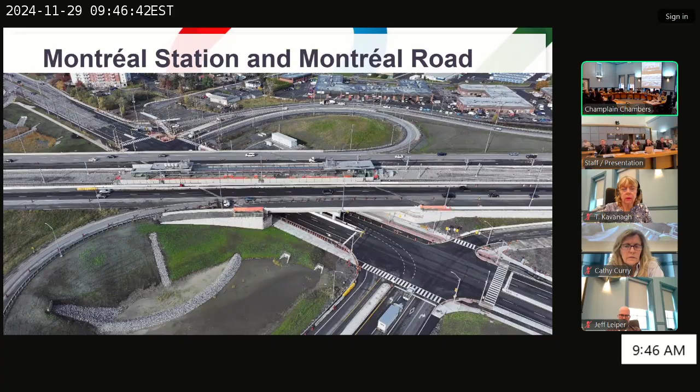If we move to the next slide, Jeanne d'Arc Station. On the civil side, we've been implementing some connectivity enhancements, as well as some rehabilitation works along the bridge itself and the road. This includes wider sidewalks and a new MUP.

They're really taking shape, as you can see from the photo here. As far as traffic mobility goes, traffic is currently on the two outermost lanes, while the innermost lanes are reserved for some of the final flat works, which are median related, including a curb that comes along the median there.

By the end of this year, all 4 lanes will be open at the bridge location. It's important to note that at the north end of the project we have the OC Roundabout project, which we're coordinating with closely, and that project does involve a lane reduction as you head northwards.

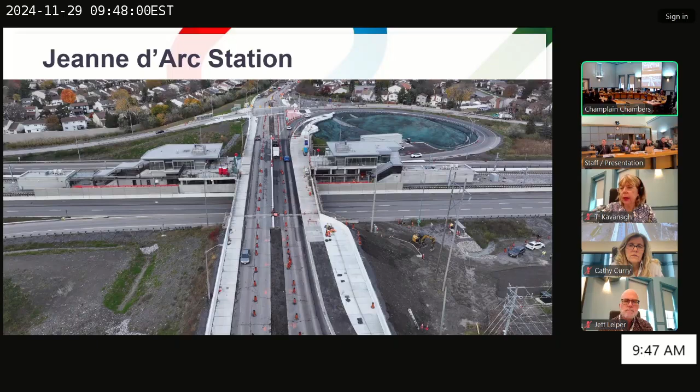Next slide, please. First, Place d'Orléans Station. Here again, the station's work is really focused around the system, testing, commissioning, and installing devices, including cameras, passenger information display systems, that type of device. At the outset, I just want to highlight how complex the station is.

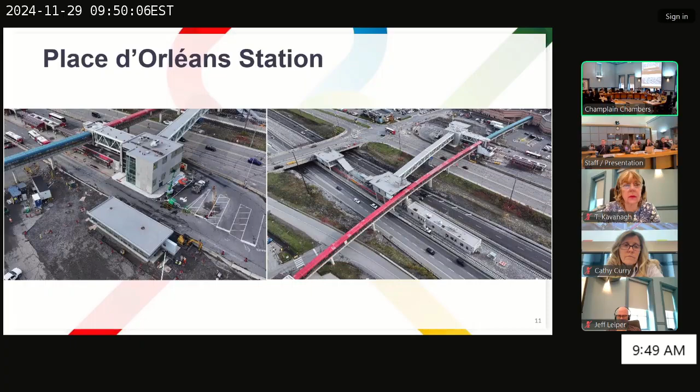If we move over to the right-hand side of the photo, you can see how that extends into the median where we have an east and a west station. In general, at this location, to highlight the complexity, we have 3 sets of elevators, 4 sets of fare gates, and 4 sets of ticket vending machines, just to touch on some of the elements. If we move on to trim.

So from the civil perspective, starting on the left-hand side, in the eastbound direction on the 174 here, we have final realigned lanes with final pavement. We have those white lines, which are the traffic delineator warning strips, warning motorists to slow down as you head eastwards and approach the intersection and slower speeds.

As far as the park and ride goes and the bus loop, we have that new Trim bus loop that has been constructed and put in service. And within the park and ride itself, roughly 40% of the parking spots are in use now. Park and ride works will continue into next year, including underground works and the granular and pavement activities.

On the right-hand side, this is just a nice view to show us that at this location we have final 174 alignment along with paving. So in the eastbound direction, we have final 174 from Champlain eastwards, and in the westbound direction, we have final 174 from Trim Road eastwards. You can see at that location some of the final paving work, and a signalized crossing that's been activated.

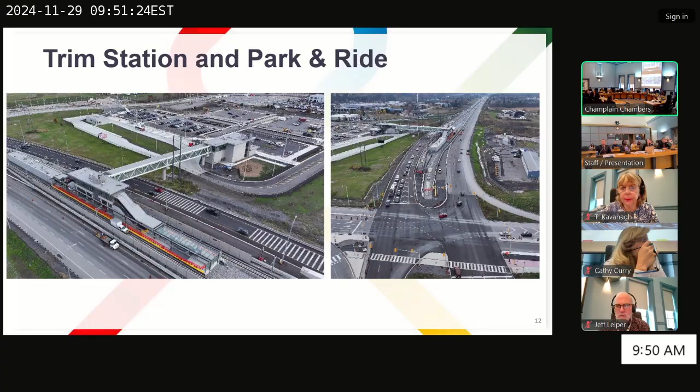If we move to the next slide, we want to touch on the construction milestones from this year - it's been a very big year. We've completed the guideway as mentioned, including track work and OCS. We've undergone train testing, which is ongoing along the complete alignment, from Blair out to Trim. We have the Trim bus loop, which is complete and in operation.

Montreal Road is in final alignment. We have some final top lift paving to come in the westbound direction on the west side. On the 174, we've done some final alignment as mentioned in certain areas where we were able to, while we have BRT lanes still operational, and those are highlighted there.

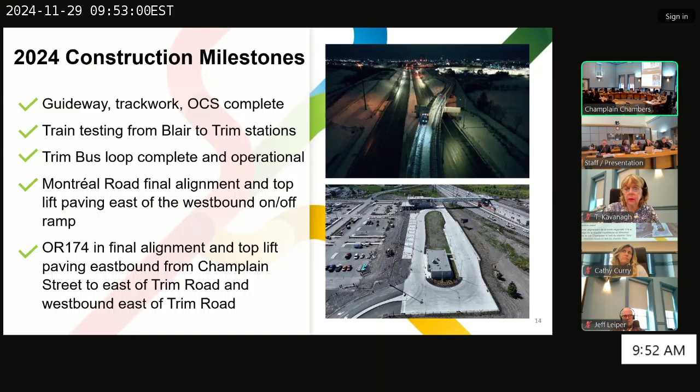We can move to our next slide. Upcoming east activities will really have a big start next year as we continue works through to substantial completion. We'll continue our train testing, and our operator training will begin in the new year. This is Blair Station eastwards out to Trim.

We will complete the remaining areas of the Trim Park and Ride in Q2. By Q2 as well, we'll be paving Jeanne d'Arc Boulevard, and in that same quarter we'll be working to get all of our station occupancy permits in hand.

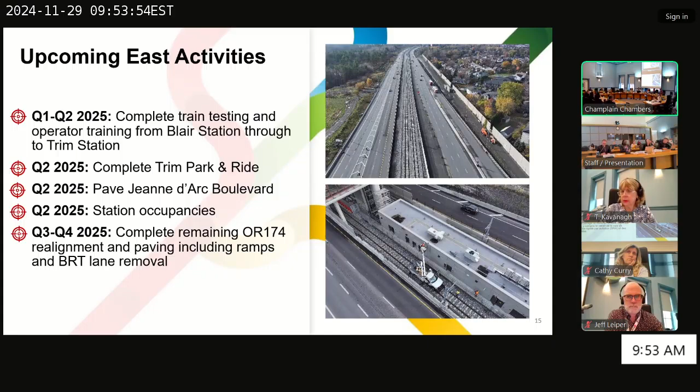We did want to highlight that after the project itself, once the line is operational, we do have works that remain. These remaining works are mainly centered around the 174 highway, which will involve removal of the BRT lanes, realignment, and final paving. Those activities can only take place once our line is operational, as we need the BRT up until then.

On the traffic mobility side, we wanted to take some time to go through each of the key areas in the east. Starting with the 174, we will have lane and ramp closures that will continue as required. In general, we can expect closures for the next 3 weeks, taking us through to December 22nd.

There will be a full shutdown in the east for a 2-week period over the Christmas holidays, so there won't be any road closures during that time. Generally speaking, there will be limited closures over the winter, and then we will see a ramp up in the spring as works continue and weather allows us to pick up where we left off this year.

As mentioned previously, we want to reiterate that there's additional paving and highway works to be completed post substantial completion, which we can expect in the back half of next year, 2025.

Moving to Montreal Road, we are in the current configuration, which we will maintain through the winter. In the spring, we will continue the final top lift paving west of the 174. Similar to the final 174 works post substantial completion, we can expect some ramp work at that time as well, because removing the BRT lanes will also remove the BRT lanes that continue through the ramps in that area.

At Jeanne d'Arc, as touched on earlier, by the end of this year we will have all lanes open on the bridge. There are roundabout works just north of that, but the bridge itself will have all lanes opened by year end, and that configuration will be maintained through the winter.

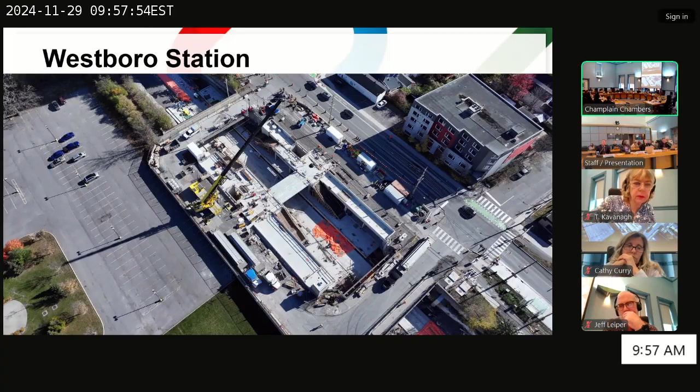I want to direct your attention to the large crane here. We've flown in some precast panels as part of the concourse over the guideway. The contractor elected to go this way to prevent the use of formwork, saving time, and allow equipment and operations to continue building out the guideway underneath without blockages. This helped us, especially since Westboro is the last station to get up and going as part of the program.

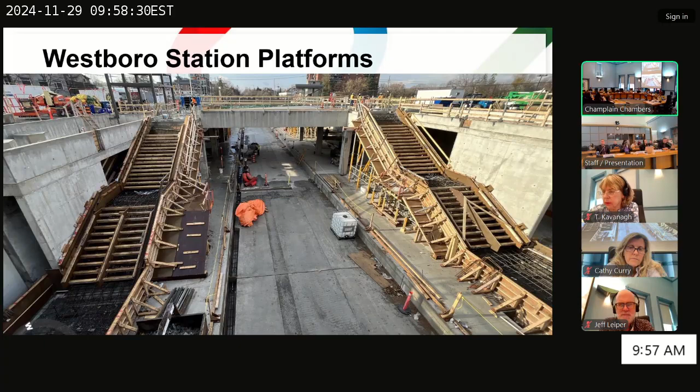Continuing west, we move on to Kichi Zìbì Station. The steel and concrete for the station has all been completed. Right now we're working on the finalization details for the roofing of the structure, the interior ceiling of the concourse level, and some outside cladding on the southern emergency buildings.

You can see there's a little bit of yellow there, we're just putting the cladding on those. Working on some glazing and finalizing some of the electrical and mechanical works at this station. Once those works are done, we'll start testing and commissioning for this station.

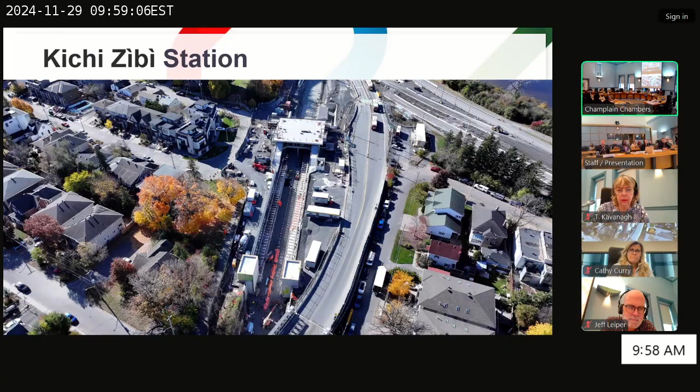I want to give a quick update on the cut and cover progress of our tunnel, the Parkway Tunnel itself. Back in August, we finished the last pour down by Lincoln Fields Station, and we've since backfilled the entire tunnel as a whole.

We're starting to do the interior outfitting of the tunnel, including the concrete plinths and the pulling of the rails. You can see some of that work at the portal there. We've also started work on the dry fire line system and are continuing with some system works in the tunnel itself.

Just want to direct your attention to the left-hand side there, Kichi Zìbì Mìkan Parkway, currently in the temporary configuration. In 2025, we're going to look to move that into the ultimate configuration, so there'll be a lot of work to move that back over in place.

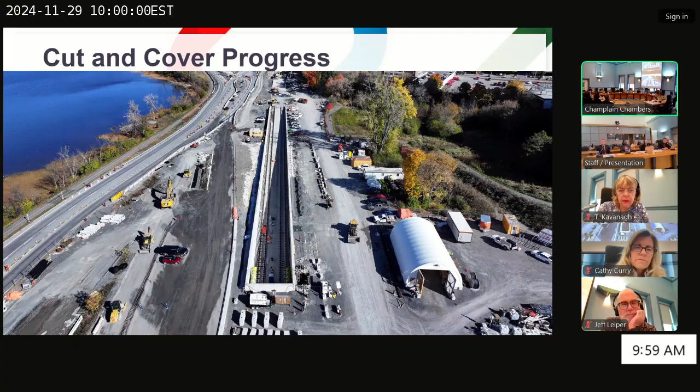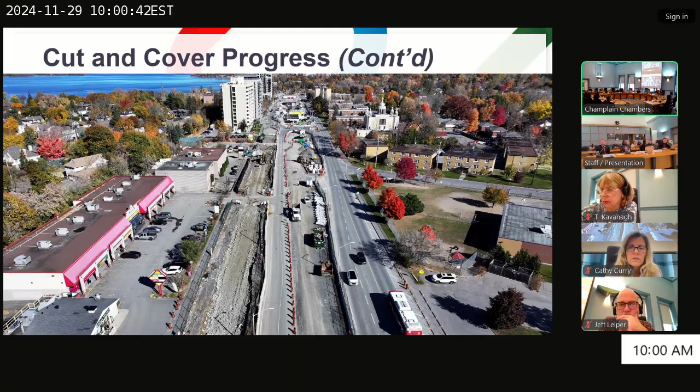I want to touch upon the Richmond Road Revitalization Project. As part of these works, there's a lot to be done: brand new water mains, storm sewers, sanitary systems, revitalization of the roadway. We're going to include a pedestrian cycling network, and Byron Linear Park is going to get a facelift as well. It's very exciting—in 2025 you're going to see a lot of this work come into fruition.

Moving back into our eastern station in the Parkway Tunnel, Sherbourne Station. Underneath the actual station concourse level we have our TPSS. Some of the interior works, such as insulation and drywall, are being completed as we speak. We also have a lot of mechanical and electrical work going on at the interior concourse level and lower platform level.

Moving to our western station within the Parkway Tunnel, New Orchard Station. We have mechanical and electrical work going on similarly here, plus some exterior building cladding. As you can see on the left side, the yellow insulation there, we're going to cover that up with the building cladding.

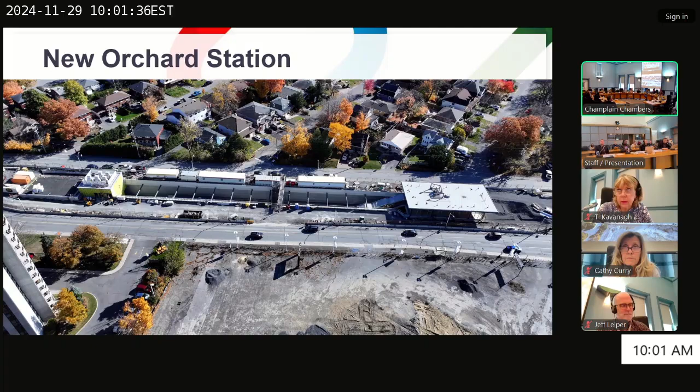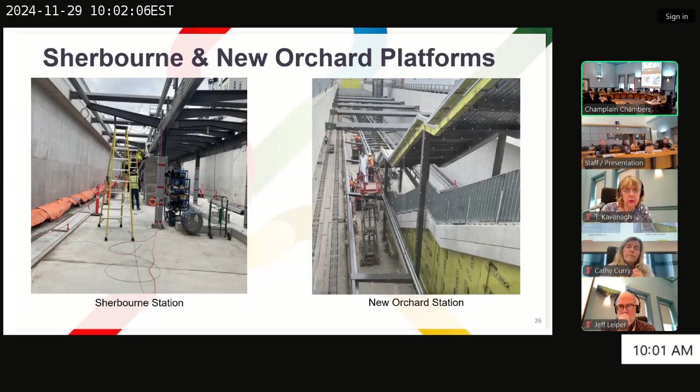Some other components of the mechanical and electrical rooms as part of Sherbourne and New Orchard Station—we're currently working on finalizing the roughing out. So insulation, drywall, some electrical and mechanical work as part of this will be underway currently and will continue to progress into 2025.

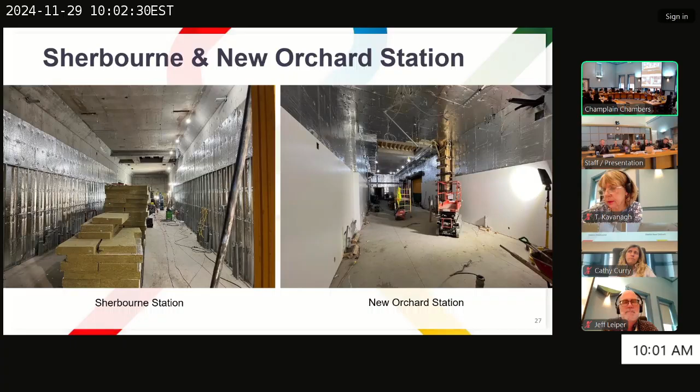We have testing and commissioning currently ongoing with the bus operator building. In the actual LRT station itself, we're currently working on the fare gates and ticket vending machines. It's one of our most advanced stations to date in the West.

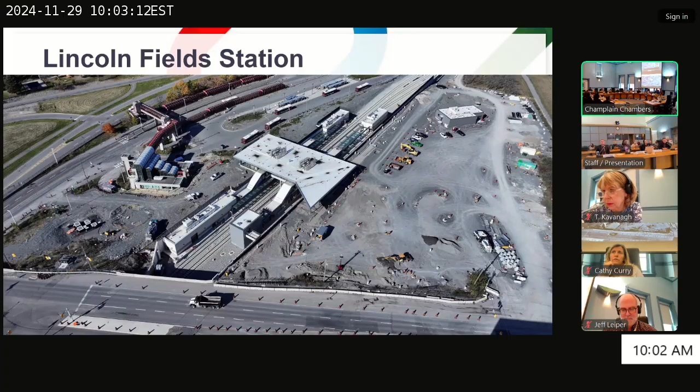This photo is looking south of Carling Avenue towards Connaught Flyover, which is in the far top of the photo. Some things to point out: we have Woodroffe High School on the left-hand side, and the Woodroffe pedestrian overpass structure, which is currently open to the public and in use. On the right-hand side, we have the existing bus rapid transit system detour currently in place that allows flow of patrons from Lincoln Fields up to Iris and to Algonquin.

We're building the actual track system for our extensions into Moodie as well as into Algonquin Station. You'll see four tracks here as part of this. This is where the actual split occurs, where we head to Algonquin and to Moodie. The flyover allows the bus rapid transit system to actually operate while we're doing construction, and it also crosses Pinecrest Creek.

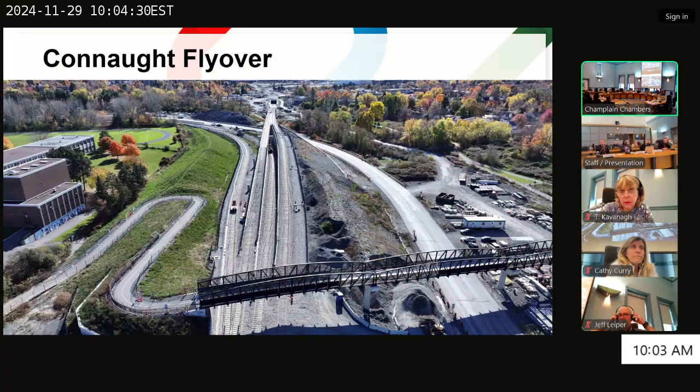Remaining works in this area: we have OCS works that need to be completed, which will continue into 2025. In the near future, we'll be removing the bus rapid transit system and covering it up with landscaping. It'll be back to a more greened-up area, with landscape, trees, etc.

Continuing south to our last station, Algonquin Station. The big head house is on the south end, where bus transitway users could get off and come in through this building facility. You have two options: you can drop down into the actual LRT station itself, or you can come up and connect through the new pedestrian overpass structure, which connects into Algonquin Station.

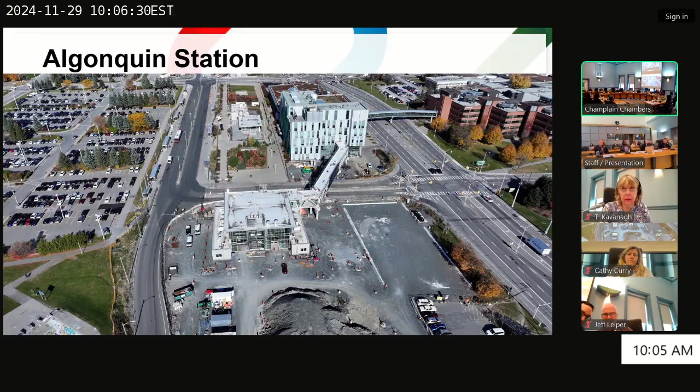Let's get a little bit more of a look inside the actual building. On the left-hand side is the elevator housing and shroud, and the panels are all in place now, post this photo. We're currently working on the doors and some overhead signage. The escalator, as you can see, is still in construction mode, and we're also working on testing and commissioning of the components currently in place.

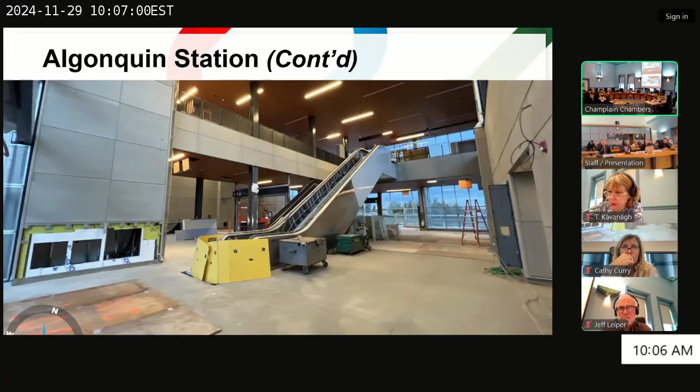While we're in the southern leg, we thought it'd be nice to touch upon the Pinecrest Stormwater Management Facility. What we have here is basically the day before we started construction: a big open area with a single multi-use pathway. Pinecrest Creek is hidden behind those trees on Baseline Road, on the right-hand side there - that's the start of where Pinecrest Creek starts. We have an underground sewer system that outlets between some of those buildings and then heads, I would say, west in the photo.

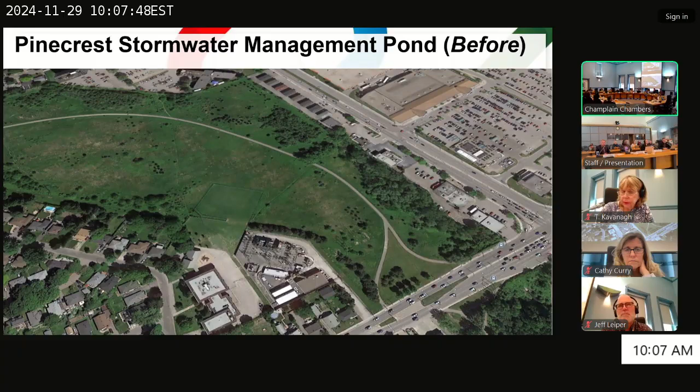That's where Pinecrest Creek ultimately starts, slides underneath Woodroffe, and then heads north towards Iris Station. As part of this, our project looked to provide control to the stormwater that's there. This is what it looks like today. We've taken this major storm sewer catchment area that used to come through a pipe and into a creek uncontrolled, and now we've put it into a three-celled stormwater management facility, so we can control the flows that come through Pinecrest Creek.

We now control the water, and we actually now have time to let the particles settle within the pond itself, which we can clean out. The pathway network within this area now goes right throughout, so any parties that want to go east, west, north, or south have the ability to do so. We also provided a lookout on the left-hand side at cell 2 with benches, so users can go there, take a rest, enjoy the views, and relax. It's a really nice change, a huge success, and I think it was worth noting as part of our program.

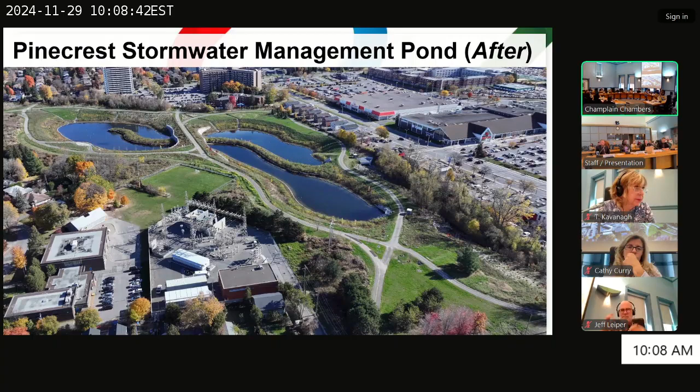Continuing west now towards Moodie, we hit Queensview Station. Right now, a lot of the work is on the interior side. We're working on the ceiling within the concourse levels and the elevator installation, as well as some mechanical and electrical finishes on the interior. We are also currently sandblasting the concourse level and platforms to get them ready for final finishing.

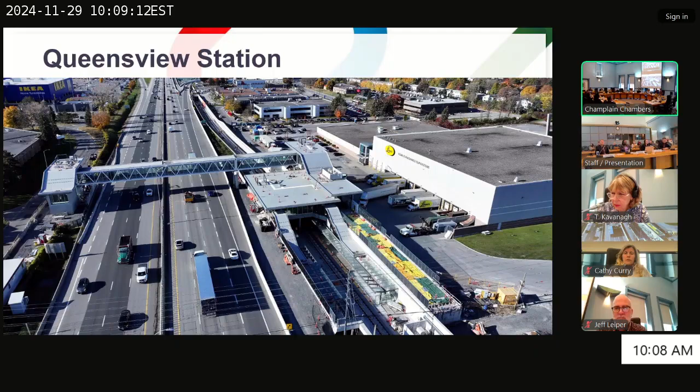Moving on to Queensview Station, the elevator shroud is in the final stages. Mechanical and electrical finishes within the station itself are currently underway, and we're working on testing and commissioning as we speak. Just to the north, where you see a lot of the laydown area, this is where buses will be doing drop-off and interfacing with the LRT facility itself. That work is going to commence in early 2025.

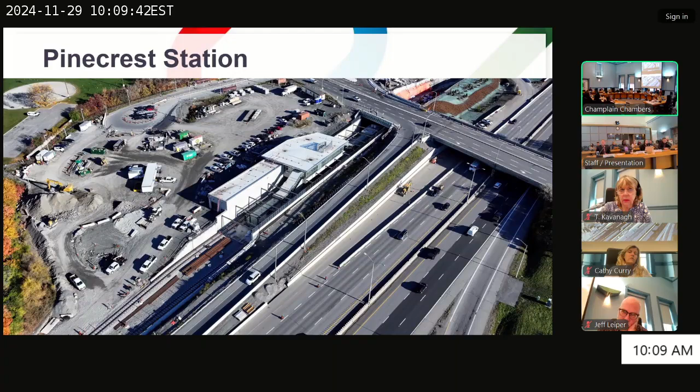Dropping down into Pinecrest Station to give users a view of what it would be like when you're waiting for the train. A couple things to note here: you can see the platform edging is in place, and we have our direct fixation type rail through here with concrete plinths. The rail has been completely pulled. We've got some of the platform lighting in place, and some of the mechanical and electrical work on the left-hand side we're still working on. The other thing to note is that large wall on the right-hand side, which helps retain the north to west on-ramp from Pinecrest to the 417.

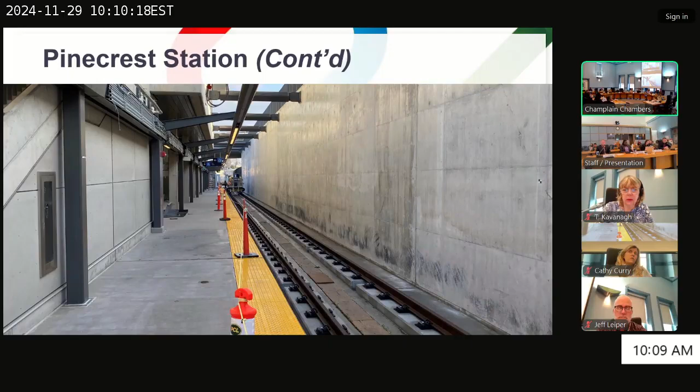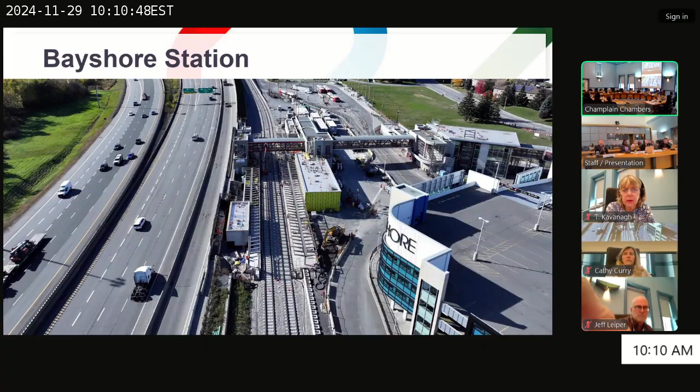Continuing west here to Bayshore Station, a lot of work has progressed. Currently we're working on the emergency lighting and sump pump in the emergency tunnel underneath the guideway, which you'd recall from previous photos, now completely covered with guideway, track, etc. We're also working on the fireproofing of the bridge structure connections that go up above the guideway and the bus rapid transit system, and currently finishing the exterior cladding of some of the buildings.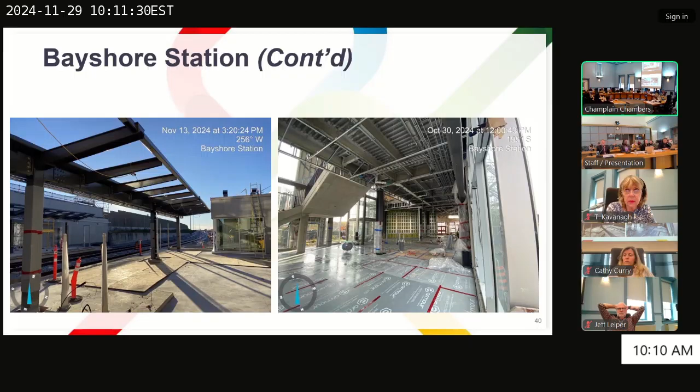So moving to our last station in the west, Moodie Station. As you can see here, the rail has been pulled through this station itself. OCS is to come next. Here we'll also have an intertrack barrier as well, similar to Iris, to deter patrons from jumping across on the guideway from one platform to the other.

We have some water main works that are currently underway, which will cause some impacts to Corkstown. We'll talk about that during the traffic impacts. On the left-hand side is where our bus facility will ultimately reside. We'll be starting that in early 2025, and that will also have a passenger pickup drop-off location.

Jumping into Moodie Station itself, you can see it's pretty advanced. A lot of the finishes are in place. We have room finishes completed. Our elevator is installed, the shroud around it, with some minor cleanup with electrical work as part of it. Our platform cladding and platform topping slab are completed.

Next works will include some minor electrical and mechanical works. Once that is completed, we'll continue on with some of the testing and commissioning of the actual station facility itself.

Heading to the light maintenance and storage facility, the LMSF, you can see all the track is pulled to date. All the OCS is in place and energized. And we're looking to start some testing here in the near future.

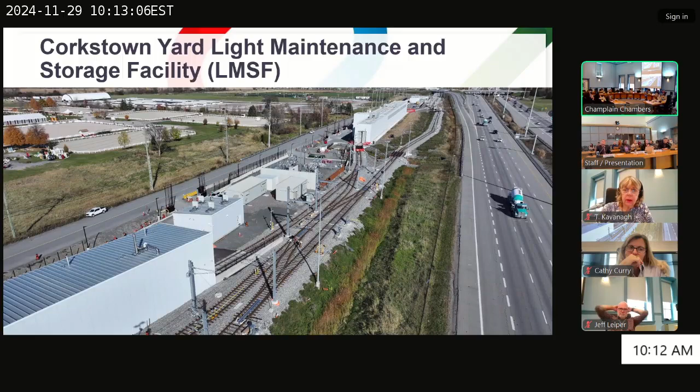As part of the next slide, we announced in September that we had our first LRV delivery to the LMSF. That's great because we've now assembled it and we can start testing soon. We're happy to say that we will be sending over 2 more LRVs, so we'll have 3 in total there before the end of December.

This is going to help us advance testing as part of our program. If we had to wait to get a train from Belfast all the way out to the LMSF, this would take a long while. So what we've done is leapfrog some of the testing and advance that by providing 3 LRVs over at the LMSF.

As things come online with energization and OCS, and the guideway is available, we'll start pushing these LRVs out to Moodie, Bayshore, Pinecrest, Queensview, and start that testing phase in advance of works if we're still outfitting between the tunnels. This will help us test this system and get it up and going faster. So a huge advantage to part of the program.

I just want to highlight some of the construction milestones that I've already talked about. So we have the LRV delivery, and as I said, we'll have 2 more before the end of December. The commissioning of the LMSF, and then as we indicated, we'll start pushing trains to the east.

The revitalization of Richmond Road project is going to get up and going. This next year is going to be a big one for us as part of 2025. We look forward to getting a lot of those underground works in place and then moving into the surface works. And the completion of the cut and cover tunnel structure with the closure of the last pour, the backfilling of it.

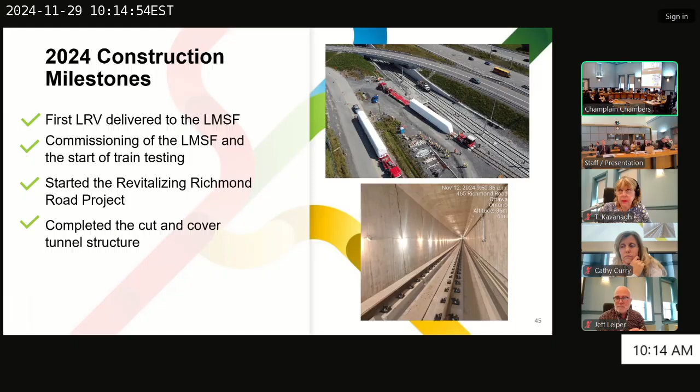As you can see here in the bottom right photo, this is what the tunnel actually looks like today. We have our concrete plinths in, some rails in. We have our duct bank on the right-hand side where we'll start pulling some of the cables. And on the top right is our dry fire line. So it's pretty advanced and we continue to work through it.

Noting the upcoming activities as part of our program: once again, the 2 LRVs to be delivered in early December. Once again, Richmond Road Complete Streets revitalization. Into 2025, the OCS and catenary system on the main line, with 2025 completion of the track.

Right now we are roughly 90% plus or minus of track pulled in the west. That's over basically 30 kilometers of track that's been pulled. It's been a huge undertaking here and it's been pretty successful. We look forward to finishing that in early 2025.

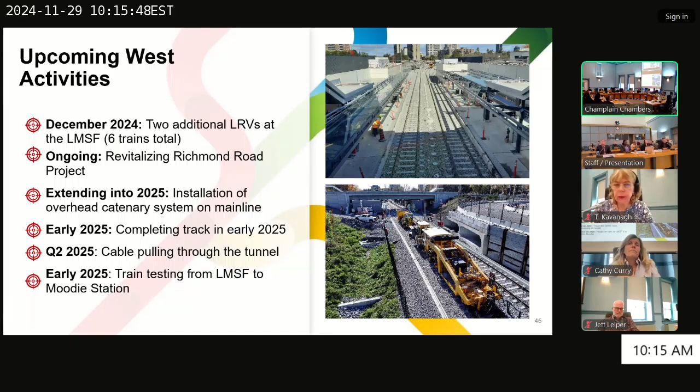As indicated as part of the tunnel works, we're going to look to start pulling cables through the tunnel in Q2 of 2025. And in early 2025, train testing at the LMSF, once we have the 3 LRVs up and running, and start pushing that towards Bayshore, Moodie, and Pinecrest.

I wanted to touch quickly on some of the traffic and mobility impacts we will see over the next couple of months. As Jocelyn indicated, as part of winter works coming forward, we're going to stabilize these works because a lot of them will slow down during winter. But we still have some work to be done.

We're still working to seek final approvals on some staging with the Ministry of Transportation Ontario, and those meetings are ongoing. We currently have impacts to the westbound off-ramp at Pinecrest and Greenbank, still in a temporary condition with one right lane closed. For the westbound on-ramp from Greenbank northbound, we have to build the north to west on-ramp. That ramp structure at Pinecrest Station isn't fully built to the width it needs, so we still have to expand it. We'll need a temporary closure in 2025 to widen it to the appropriate width.

The 417 westbound on-ramp from Pinecrest southbound, coming from the south and heading west, we're looking to open soon. We're going through final details with the Ministry of Transportation of Ontario to get approvals and hoping to open that shortly. Moving on to the next interchange, Richmond Road.

A lot of the closures there will be associated with the snow wall build that needs to be completed. Between Pinecrest and down to Bayshore Station, the LRT guideway drops down underneath the Richmond Road off-ramp and overpass. To protect the guideway, OCS, train, etc. from snow removal operations by the Ministry of Transportation Ontario, we're going to put a snow wall in place to protect the guideway from snow being thrown onto it. That's the major closure needed. With the guideway advanced as it is, a lot of that work needs to be conducted from the 417 side, so we're working closely with the Ministry of Transportation on lane closures and impacts, and continuing to have meetings to get that sorted out shortly.

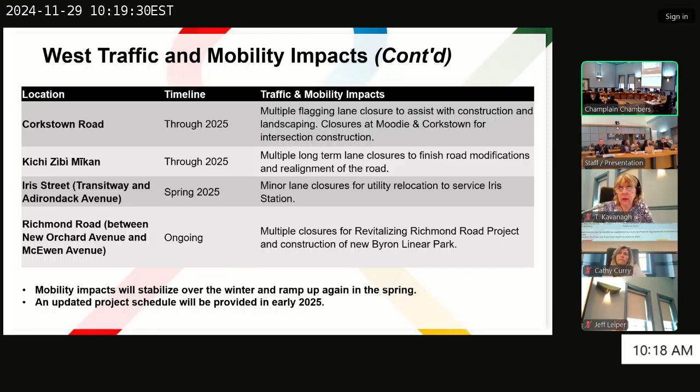I'd like to now hand it back over to Renée Amilcar to discuss where we're going.